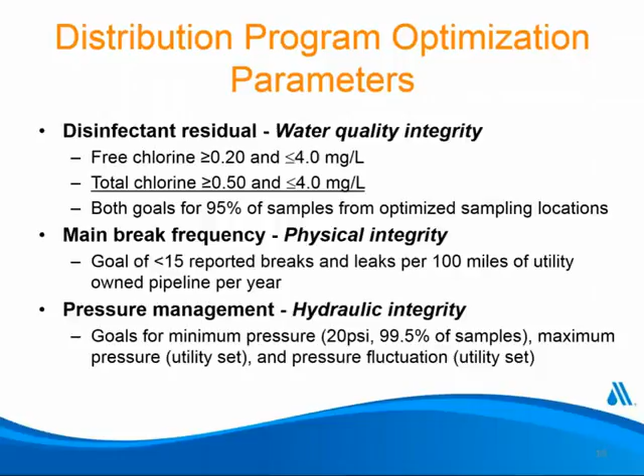So the goal is not to just sample the distribution system at the typical total coliform rule sampling sites or DBP sampling sites, but to really do comprehensive sampling over the entire distribution system, especially focusing on the areas of the system that may be at high risk for things like nitrification or residual loss.

In addition to looking at the TCR sites or the DBP rule sites, we suggest that utilities look at all finished water entry points and metering points to other systems, IDSE or IDSE-type sites, downstream of storage facilities when water is being withdrawn, and also sampling within the storage facility to make sure some kind of stratification is not occurring.

Upstream and downstream of boosters, of course, and that's the topic we're going to talk about today: boosting chloramine residual. So those are key areas we would encourage utilities to test.

Also areas like low flow areas, unlined cast iron mains, and any other areas of concern that may have a high hydraulic residence time, or where your water may mix with another water and cause interactions between chlorine and chloramine, particularly in systems that use multiple disinfectants.

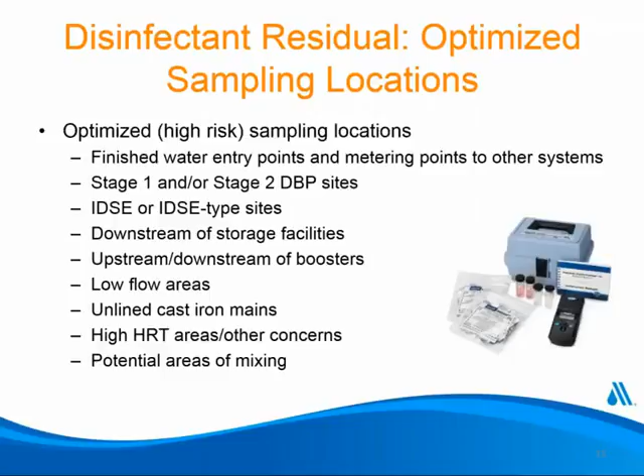So 95% of samples from these high-risk sampling locations are what utilities are aiming to meet for the Partnership for Safe Water Disinfectant Residual Optimization goals. And as we know, working with and using chloramines can impact disinfectant residual, and we'll talk about that a little bit more here on the next few slides.

The Partnership for Safe Water also involves the evaluation of about 19 additional distribution system performance improvement variables. These are other areas of the distribution system that utilities will examine during the program self-assessment process to help determine and support the optimization status. They really cover many different optimization or operational aspects of the system, ranging from customer complaints to energy management to flushing to water loss control.

But I wanted to narrow in a little bit more on the ones most related to disinfectant residual loss, particularly with respect to chloramine, and that includes disinfectant residuals itself, DBP control - which can be a driving factor for why a utility selects chloramines in the first place - nitrification, and what you do to identify and react to nitrification events should they occur, storage tank O&M, and water quality sampling and response.

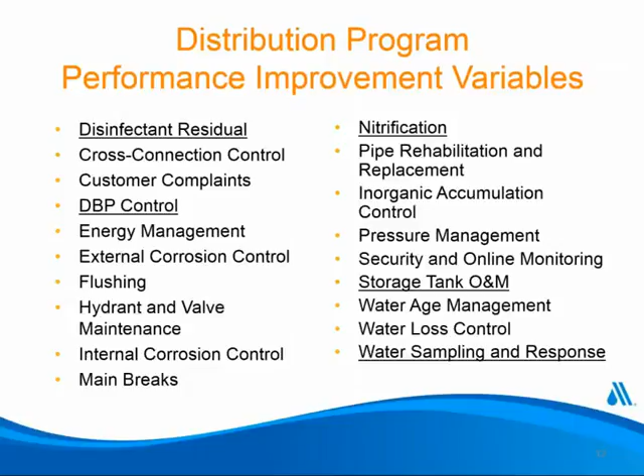These particular performance improvement variables were selected by the group participating in the Water Research Foundation project number 4109 because they tie back to each individual key optimization area: disinfectant residual, pressure, or main break.

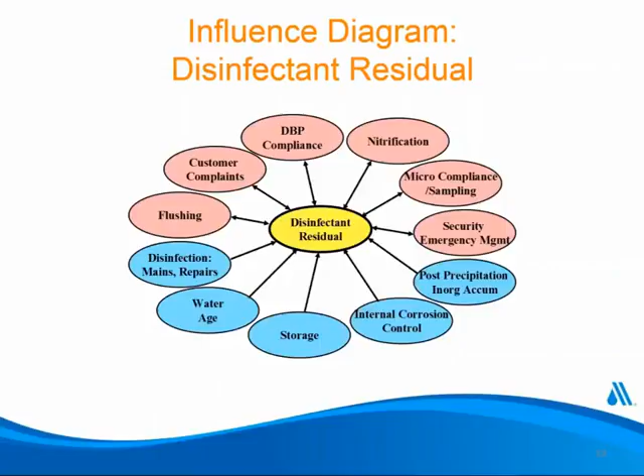So chloramine use: about half the systems in the Partnership for Safe Water use chloramine, about half use free chlorine. Hard to tell exactly why, but that's what our data indicates at this point.

But systems using either residual disinfectant can participate in the program as long as they use the residual disinfectant. That's the important thing. Many utilities use chloramines because of benefits like reduced DBP formation relative to free chlorine, and particularly for utilities with larger distribution systems, there tends to be improved persistence of the residual throughout the system.

Of course, chloramine can also present some challenges. For one, it's not typically seen as a primary disinfectant for treatment because it's a weaker disinfectant than something like chlorine dioxide or free chlorine. Certainly, using chloramine requires a little bit more control work to be performed at the utility.

Andy will be talking about this shortly, but making sure the chlorine-to-ammonia feed ratio is optimized when chloramine is added at the plant and also in the distribution system if it's boosting. There's always the risk of nitrification occurring, particularly in higher temperature areas.

If you're out there actively looking for nitrification, you're doing more laboratory testing potentially, which could cause more labor. But it pays off if nitrification is caught before it really takes hold. And if nitrification does occur, these systems are at risk of losing residual. So there are challenges that need to be balanced with the benefits of using chloramines.

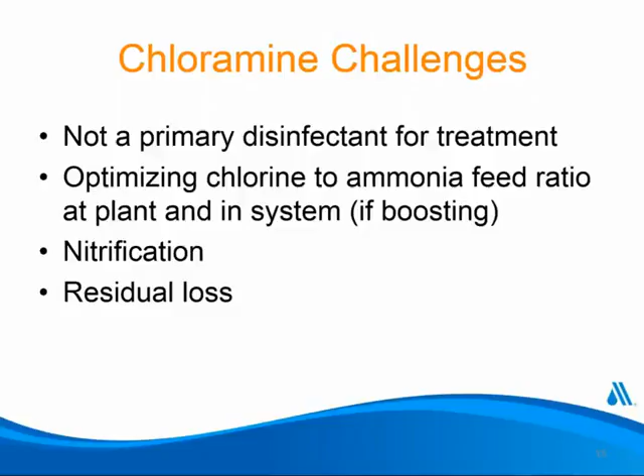The self-assessment team will get together and ask: does my disinfectant residual data meet the performance goals? For nitrification, am I monitoring for nitrification parameters in the distribution system? Have I established action levels for different concentrations of these parameters and SOPs to follow if I reach those action levels? Are storage tanks monitored for water quality? And is free ammonia monitored where interaction may cause breakpoint issues, and so on?

The goal of the self-assessment is to determine whether, relative to these questions, the utility is optimized and documented, partially optimized, or not optimized. In areas where they feel they're not optimized—maybe they don't have action levels set for nitrification—they would need to develop an action plan and a set of steps to optimize the distribution system.

So at that point, we're going to leave the topic of the Partnership for Safe Water, and I'm going to pass it on to Andy Seidel to talk a little bit more about options for controlling chloramine concentration in the distribution system. Thank you, Barb.

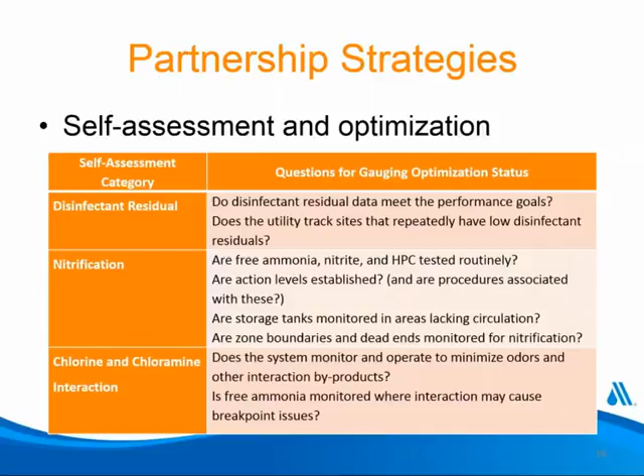So let's back up a little bit and talk about the chloramine chemistry itself. As Barb mentioned, chloramines are the chemical species formed by the reaction of ammonia with chlorine, and they've been used successfully for decades as water disinfectants, primarily for two reasons.

One is that there's a low propensity for chloramines to create disinfection byproducts, or DBPs, because as an oxidant they're much less aggressive than free chlorine. Secondly, they have persistence, or longevity—they just last longer in distribution systems. Those are really the main reasons chloramines have been used for so long and so effectively.

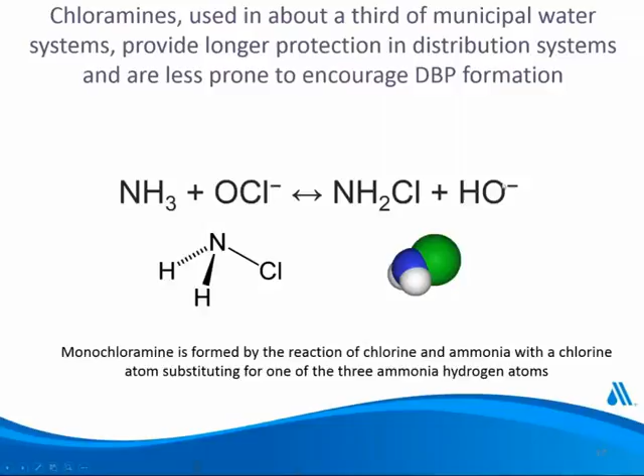If we go to the next slide, we can look at the formation of the three primary chloramine species, only one of which, monochloramine, the first equation, is desirable in a water system.

These other variants, dichloramine and trichloramine, have a number of side effects, such as limited persistence in a distribution system and objectionable taste and odor issues. So these last two are essentially unsuitable for drinking water and generally not a beneficial byproduct of the chloramine chemistry.

Most importantly, if you look at the first equation where we form monochloramine by reacting ammonia with hypochlorous acid or chlorine, you can see that the reversible nature of that reaction means monochloramine can actually decay. This is called monochloramine decay, where the monochloramine through a hydrolysis reaction can create ammonia back in the system again. This is one of the reasons why perfectly good chloraminated water can leave a water wholesaler treatment system and arrive at a customer tank or reservoir with some level of ammonia already in it. It's not necessarily that the water was bad, it's just the nature of the reversible chemical equation.

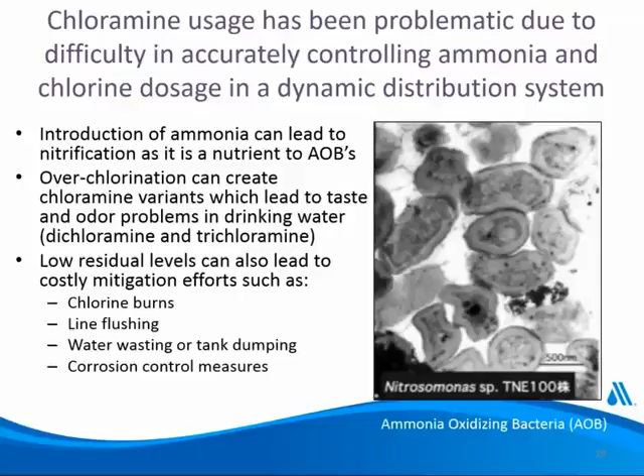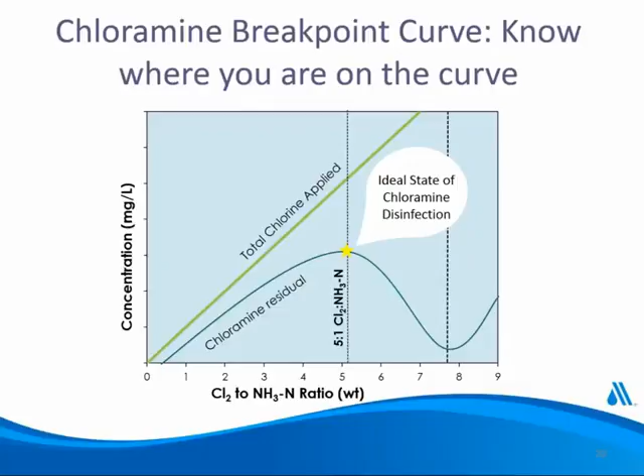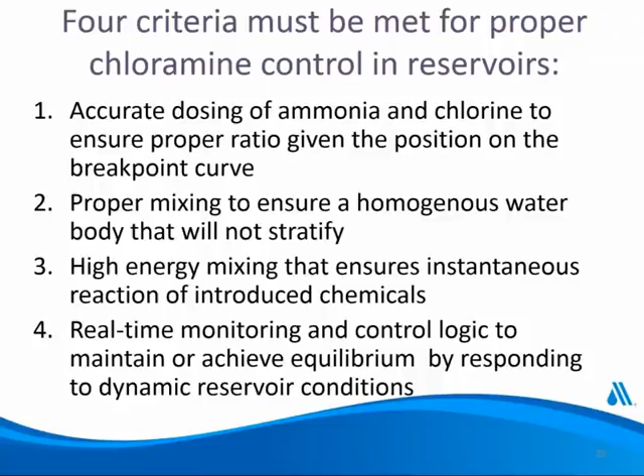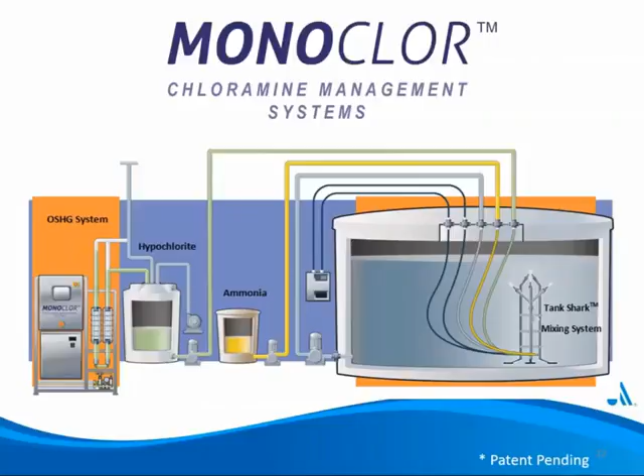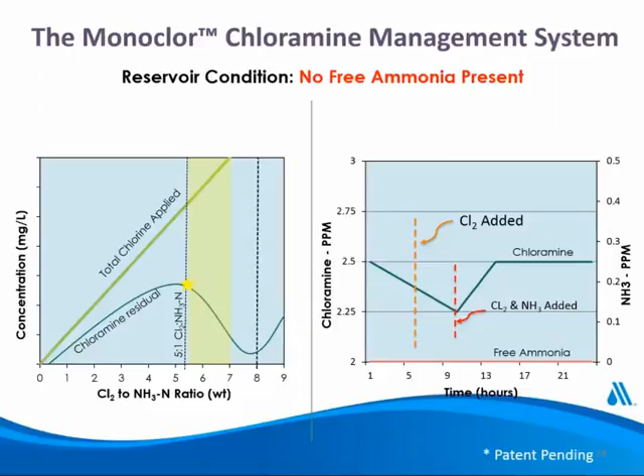What I'm going to have Brent Simmons do is explain sort of how the system is constructed and how it's actually implemented, in two very quick examples of how it works, and we'll move into the utility case studies. Brent? Next slide, please.

Okay, what you're looking at here on the upper left is a Monoclor pilot trailer. Bottom left is a picture of what's inside of that pilot system, which consists of the on-site hypochlorite generation system. And by the way, the PLC-based control for the on-site system is also where the algorithm that Andy just described lives. That's where the calculations are made, and that PLC panel not only supervises the generation of on-site hypochlorite, but the entire process is monitored at that location, and that's the operator interface.

But you see bottom right, the side view of the chlorine generation system, supply of salt. To the right, DI bottle, because we don't have a disposal mechanism for a softening system in the field. And then the trailer is fitted out with the hypochlorite storage tanks, double containment, metering pumps, analyzers, a little bit of lab space. The fully contained, fully functional pilot can be deployed and put in operation in about 2 days. So we have these running around the country right now, with some very successful results that you'll see coming up in the following case studies.

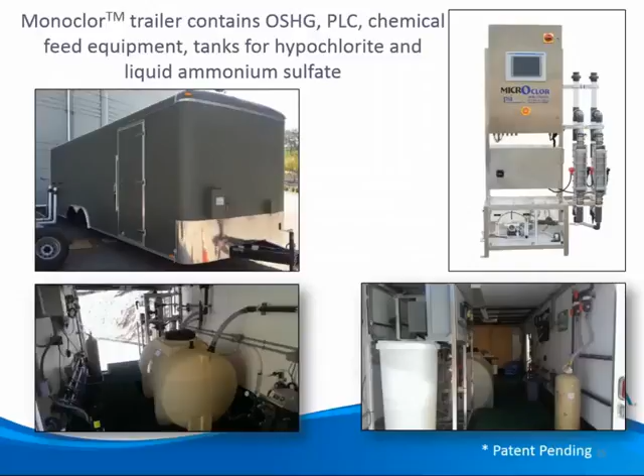Next slide, please. This is San Jose Water. Typical installation detail. We have anywhere from 2 to 4 penetrations, generally through the hatch flange, made in a sanitary fashion. You see the tank shark mixer being deployed on the upper left. All NSF-approved materials of construction, and it's being sanitized before it drops into the hatch.

There is no confined space entry, no divers required. Everything about the system simply drops through the hatch and is lowered down to the base of the reservoir. Slide on the right is this particular reservoir.

We had a requirement to keep the liquid ammonium sulfate 30 feet away from the chlorine generation system. So a little yellow plastic cart there is where the LAS was stored and fed from. And just as a comment, if any of you have worked with aqueous ammonia feedstocks, you can imagine the nightmare it would have been, summertime, 100 degrees, trying to maintain that liquid, where the liquid ammonium sulfate is completely stable, zero volatilization, and much friendlier from an operator perspective. So very successful deployment at San Jose Water.

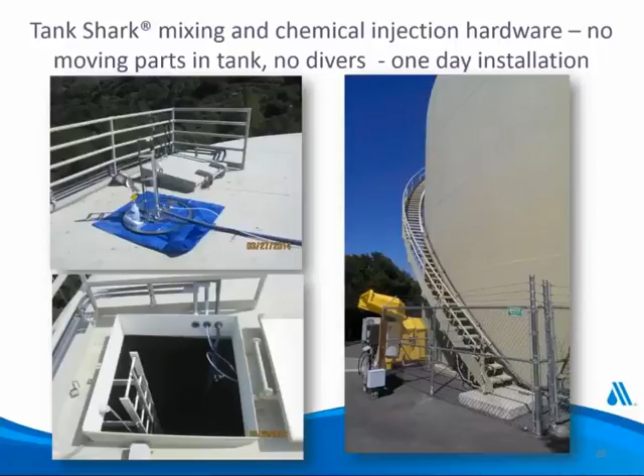Next slide, please. More detail of how we actually interfaced to the reservoirs or tanks. This was a brand new reservoir, which actually had welded fittings to make the penetrations. Just a little different variant.

We have probably 15 different versions of the tank shark itself. The one on the right there is set up for the injection of gas chlorine, which the monochlor process supports. You see a PVC bonnet located above a mixing nozzle, 2 additional nozzles, and this particular unit was going into an old tank where we only had a 24-inch square opening to work with. So it's been built with a collapsible base. That was deployed in Texas about 2 years ago.

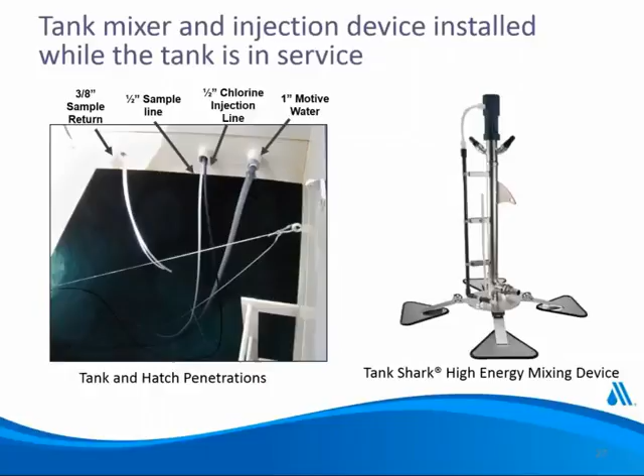Next slide, please. This is the actual 1 million gallon tank where we deployed the tank shark at San Jose. It's approximately a 40-foot tall tank, and you're looking at the liquid level about 10 feet down from the hatch. So you see the amount and the high energy mixing of that water. You're seeing the effect from the tank shark 30 feet below.

And a very important part of the whole monochlor deployment is the amount of applied mixing energy. This obviously shows we're getting good mixing, but for every project that goes out, we look at the reservoir geometry, the reservoir volume, and the dwell time in the reservoir to determine the amount of energy we need to apply. As an example, our smallest tank shark is in the neighborhood of 1,000 watts of applied mixing energy, and our largest systems go up to 15,000 watts. So it's very important, like Andy mentioned, that you have the proper amount of energy being applied to be successful in the monochlor approach. Next slide, please.

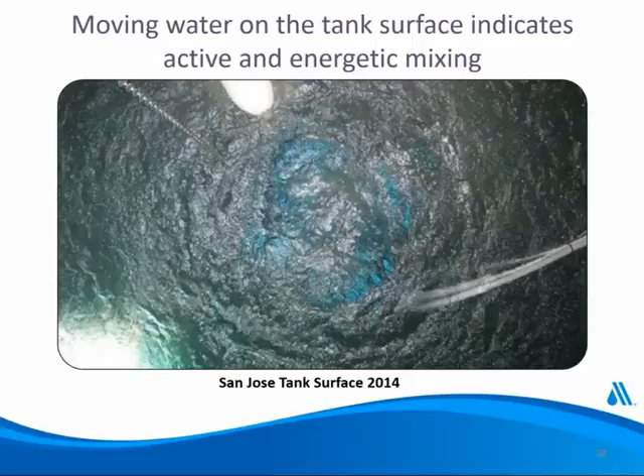Some data from East Bay Mud in Northern California, detailed in an OpFlow article. The 6 months worth of data shown here: we had a reservoir, 10 million gallons, with constant issues with low residual, and we deployed the monochlor process. Looking at the data over the course of 6 months, there are a couple spikes relating to analyzer calibration, but we basically solved the problem by implementing the 4 major aspects of monochlor. This would be one of our largest mixers due to the volume of the reservoir.

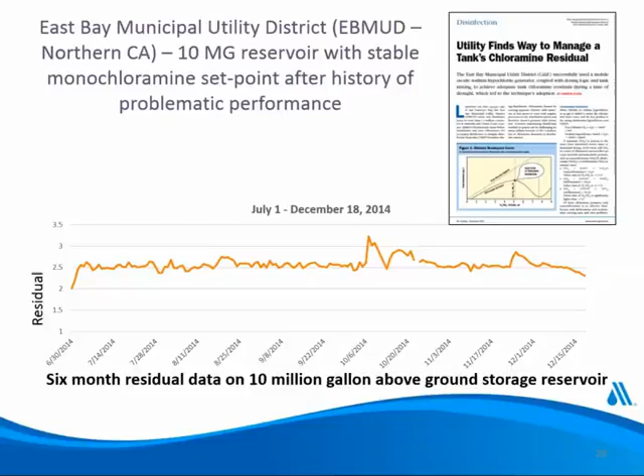More data from Eastern Municipal. You see they raised the set point to 3 parts per million, and the yellow line is actually tracking tank elevation, which moves around from 10 to 23 feet on that 6 million gallon reservoir. You can see there's no effect upon the residual associated with tank levels. So the monochlor process and tank shark works independently of fill cycles, draining of the reservoir, and overall level. It diagnoses the internal quality of the reservoir and doses appropriately to maintain set point.

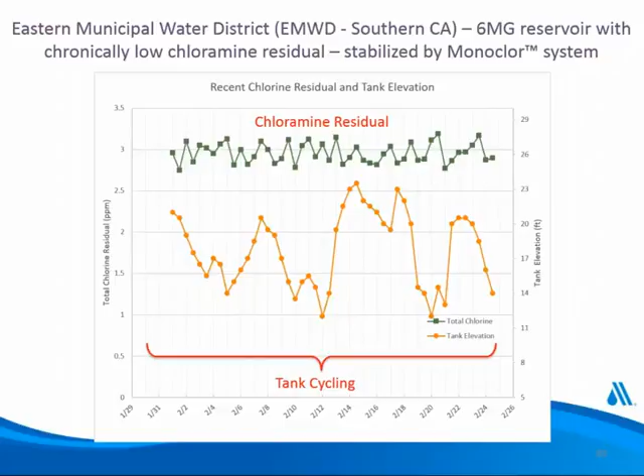And this is my last slide. We're going to hand it over to Francois from San Jose Water. Next slide, please. Thank you, Brent.

This is Francois with San Jose Water Company. I'll give you a little background before I cover the details of this slide. San Jose Water Company is actually celebrating its 150th anniversary this year, which is good for the West. I'm sure there are some Eastern utilities that think it's a young utility.

We serve a population of about 1 million customers in the South Bay of San Francisco. We have about 2,400 miles of pipe, 25 well fields, 2 water treatment plants, and we import surface treated water from the Santa Clara Valley Water District from 14 different turnouts. We have 26 basins, typically earth embankment type of reservoirs, and 71 distribution system tanks. We monitor our samples for TCR and for residual disinfectant at 140 distribution system sample taps.

Water, generally speaking, is 50% chloraminated - that's the water we purchase from the Santa Clara Valley Water District. The other 50% comes from groundwater and the water that we treat at our own treatment plant. So that sounds like this 50-50 mix is a recipe for disaster when it comes to nitrification, and that would be definitely correct. However, I should say that we typically segregate those sources of water in different pressure zones, and we certainly operate our system to minimize mixing of those two different waters.

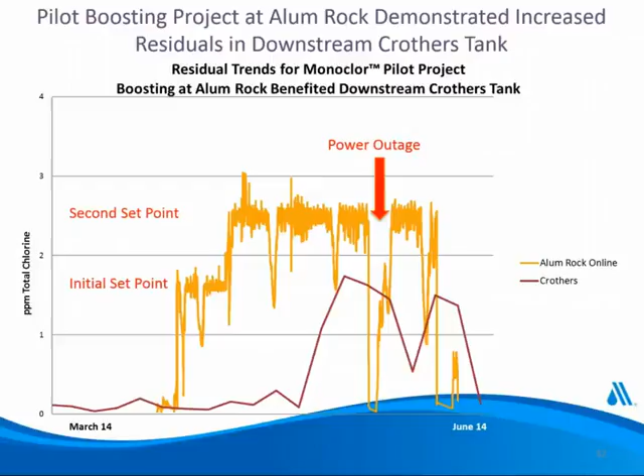It's actually 2 basins, earth embankment basins, 4 million gallons each. Our system there monitors and boosts each of the basins independently of one another. Depending on how the system uses the water, it's possible that one reservoir would need more chlorine than the other, and the system handles that very well.

As you can see, prior to the installation early this year, the chlorine residuals at all 3 locations were really not adequate. While detectable, they weren't high enough to stave off nitrification and maintain good residuals through the distribution system. Once we turned the system on, with a set target of 3, we eventually crept up to 3, and everything fell into place.

Both the basin and the downstream tank of Alum Rock, and then Crothers, responded very well and started to show good residuals. I should point out there is some wide fluctuation, where the chlorine goes from 2-something to less than 2 and so forth. That seesaw is really just operational issues we had to work through.

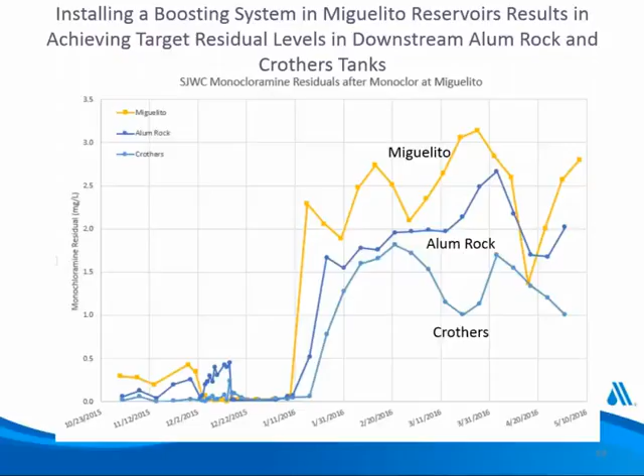So now we are at the point where the system is very stable, and both basins at Miguelito and the two downstream tanks are doing very well. I think we consider this a success.

We will be looking at doing further investments in our distribution system with the goal to get to a point where all of our tanks and residuals throughout the system meet the partnership criteria, but possibly better than that. We have planned capital improvements.

The partnership again helped us understand issues. We've taken care of all the low-hanging fruit, taken tanks out of service, and so forth. We discovered that some of our tanks in a zone, if one is hydraulically lower, depending on demand, one of them doesn't really turn over. So we are installing SCADA control valves so we can split the zone during times of low demand, and those tanks can work independently from each other.

We are installing additional residual boosting systems at key locations, and we are conducting a study throughout our system, testing every tank and building chlorine decay curves so we can understand where we need to boost and minimize the number of boosting stations, while making sure all of our tanks have appropriate residuals. We've also worked with UGSI to develop a water quality station or cabinet.

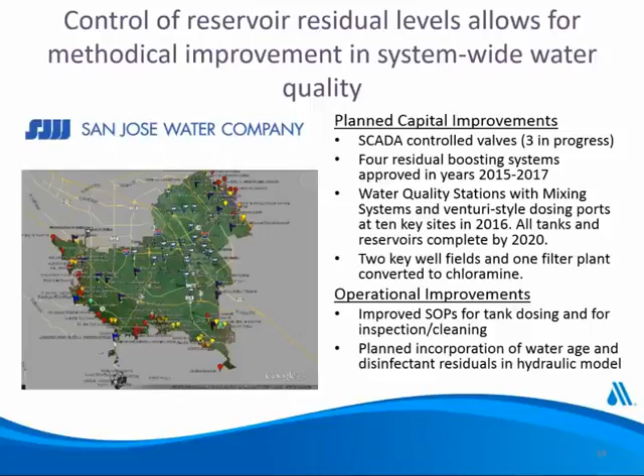A little background on Aqua Pennsylvania: we serve in the area of 950,000 customers in southeastern Pennsylvania through over 5,000 miles of pipe. We have 7 different surface water treatment plants, 70 remote well stations, and upwards of 40 different tank locations with varying storage capacities.

Hillside Tank is one of the few 10 to 12 million gallon tanks that we have. It's a very large tank, and as I said before, it's a critical tank in this area. It affects all the tanks in the surrounding area.

Each summer, if you operate a system you've heard this before, whenever it starts to get warmer, or if it's already warm when it gets hotter, we start to see the residual decline in this tank consistently anywhere between June, July through the end of September, beginning of October. This past September in 2015, we saw a severely challenged residual at Hillside Tank.

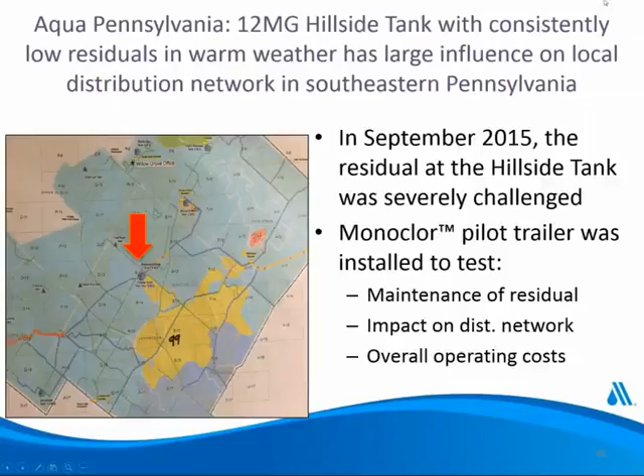We ran the pilot for approximately 2 months. We installed it in the first week of September. It was not an easy process because of the height of this tank. This is a 120-foot tank, and the operational level is between 80 and 100 feet inside the tank.

After running the system for about a week, we did not see any significant change in the residual inside the tank, basically because we already had a demand event inside the tank. The tank was already essentially gone, as we'd like to call it, or severely challenged with its residual.

So the decision was made to breakpoint the tank. It's an interesting point to note here that we were actually able to utilize the Monoclor pilot trailer equipment in order to more effectively chlorinate the tank than traditional methods, either injecting into the fill line into the tank, or as Francois had mentioned, climbing the tank and dumping a carboy in, and so forth. We were able to utilize the Monoclor trailer equipment in order to safely and effectively breakpoint a 12 million gallon storage tank relatively quickly.

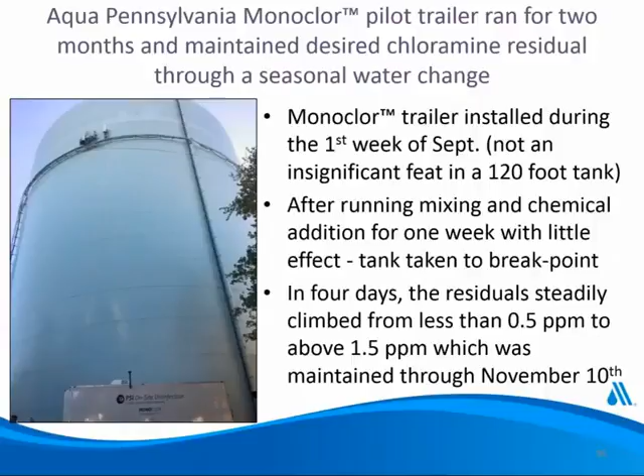After about 4 days, the residuals did climb from around a half a part to 1.5 parts per million, and that set point was maintained through the rest of the pilot. Next slide, please.

At Hillside Tank, because of its positioning within the division, it is a centrally located tank, so you do see significant flow rates into and out of this tank based on the fill-draw cycle. Interestingly for this tank, it has a different fill and draw cycle than most tanks, at least in our area, maybe not the rest of the country. Typically most of our tanks fill during the nighttime when there's low demand, and draw down during the day. It was actually reversed for this tank, where it would fill during the day and draw down during the night.

That did factor into our analysis as far as how to approach solving this issue. You can see by these graphs where the chemical feed was turned on after the system was in place. You can see the spike in the upper left-hand graph, where we took action to breakpoint the tank utilizing the Monoclor system. In the upper right-hand graph, you can see where the residual slowly climbed to our 1.5 milligram per liter set point, and then was maintained for the remainder of the pilot.

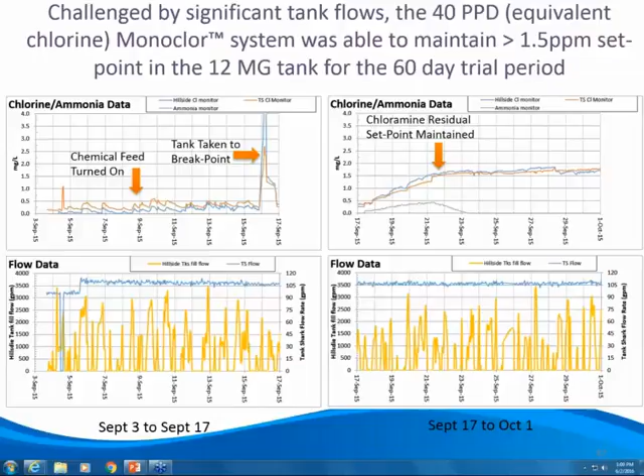So these are some of the lessons learned after the pilot. This was a challenging tank to address because of the size and the effect it would have on the surrounding area, as well as the number and difference in makeup of the sources of water for the tank. The pilot was a 40-pound per day system. In hindsight, which is always 20/20, we probably could have used a larger size, but with the size that was provided on site, we were able to accomplish a lot with this tank.

We did see a positive effect on 4 surrounding tanks in that division, where before we were having issues with the residual being very low at Hillside, we would see a negative effect where the residuals would decline and or bottom out, which would require us to chlorinate the tank. After the residual is maintained at Hillside at 1.5, we did see upswings in the consistent residual at other tanks in the area, 4 other tanks totaling about 9 million gallons of additional storage.

The water quality in the distribution system also increased with the residual increasing in a consistent manner, and we were able to see that through our total coliform rule sampling and distribution sampling in the area.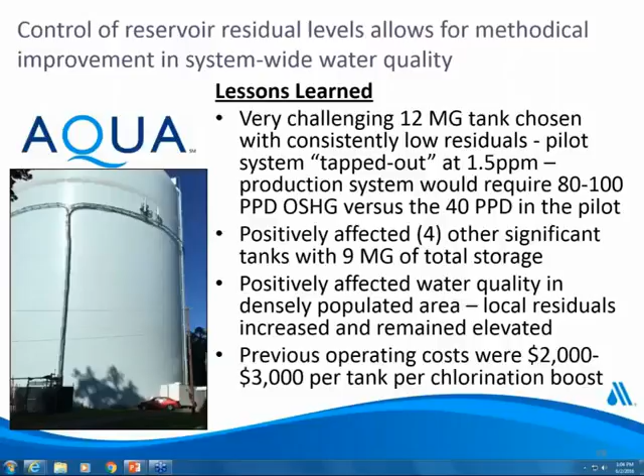To recap, while the chloramine chemistry is certainly complex, the management of chloramine residuals doesn't really have to be that complicated. If you take care of adding enough mixing and motive energy to get a tank homogeneous from a chemistry standpoint, it becomes easier. Certainly having an energetic mixing zone where you can have that kinetic collision of the reactants, ammonia and chlorine, and create chloramines at will, that certainly is helpful and a requirement.

If you can install real-time sampling to accurately assess the actual chemistry within that homogeneous tank, very, very critical. And then an algorithm which allows you to assess where you are and add the right ratio of reactants at the right time to maintain that reservoir. Those are really the four critical items.

And the benefit, obviously, is that your operational staff will have time to increasingly add value in other areas because your residual will be maintained. There'll probably be less cycling of those tanks, and essentially you'll be able to utilize your capital more fully in terms of your capital in your reservoir and tank system.

And then finally, this all gets done with our monochlor system. It gets done without the need of having mechanical parts or mechanical movement inside of the tank or reservoir itself, which makes maintenance and long-term performance much more easily attained. Next slide, please.